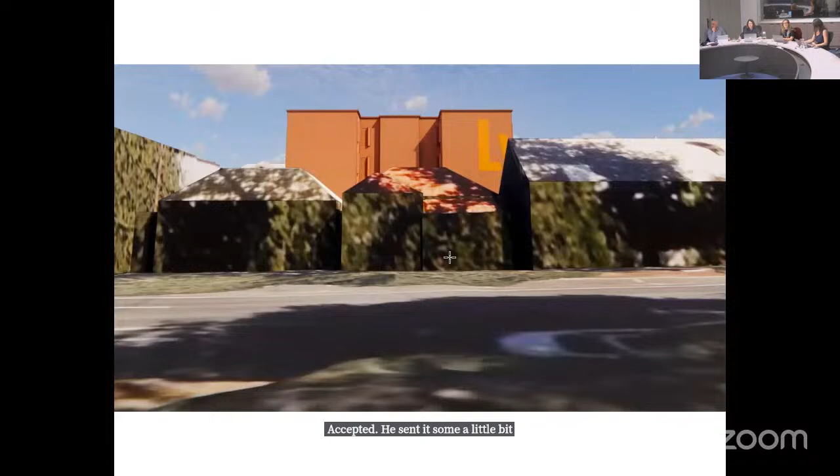Despite a directive to assess the Fremantle Tech College, our home on Norfolk Street and the Port Flour Mill, the Heritage Impact Statement doesn't even include a single word about the flour mill. It's been entirely omitted. To add insult to injury, it's referred to 10 times within the objection section. Why would you refer a concern about the flour mill to a heritage statement that doesn't even acknowledge it exists? They may as well refer to an old phone book, because at least that has the flour mill in it.

The Waste Management Plan also overlooks its residents, stating the site is surrounded solely by commercial properties. Twenty residents' homes are just ignored. There are more residences than commercial properties, by about 4 to 1.

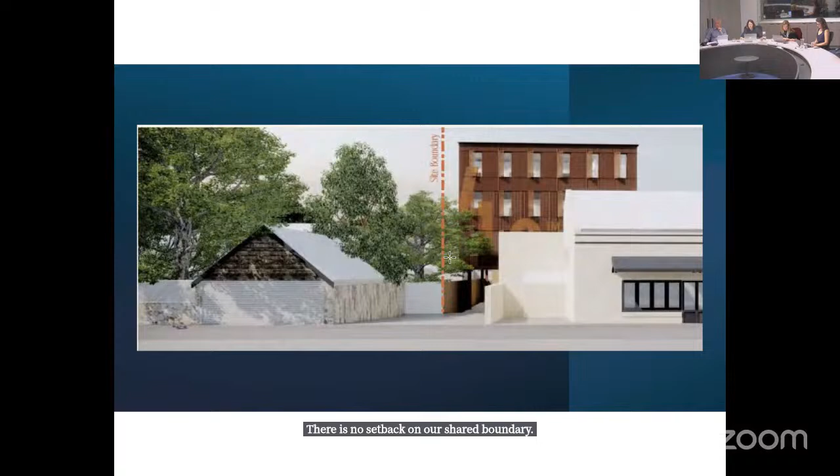The shadowing report is flawed. The report has used the combined square meterage of both 26 and 28 Norfolk Street in their calculations when used to assess impact on number 26 Norfolk Street. Whilst we currently occupy both 26 and 28, they should be considered as separate residences as they are on two separate titles, either of which we can deal with independent of the other.

Given both blocks and houses are of similar square meterage, the figures the developer has provided should be at least double. The shadowing report provides figures of 556 square metres for a total land area for both 26 and 28, and further states 34 square metres of 26 is affected by shading, a percentage of 6.1%. The total site area of land at 26 is in fact 278 square metres. Therefore, the percentage of 12.2% is more accurate.

This is a fundamental error, and one is left to ponder how many other errors have been made in this development application. Moreover, for the shadow to reach the house, it has covered our entire backyard and our outbuildings, both of which have not been considered. I submit that the percentage of our house and land affected by shading is far greater than that indicated on the report. Shadowing is important to us as our limestone home suffers from moisture retention and rising damp.

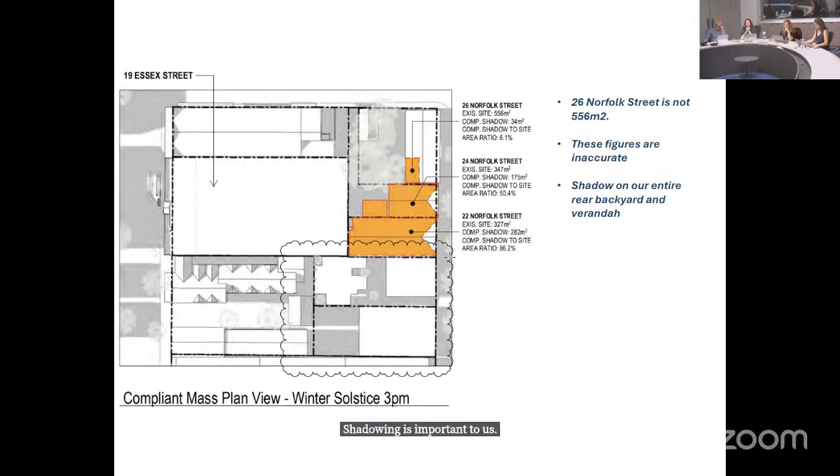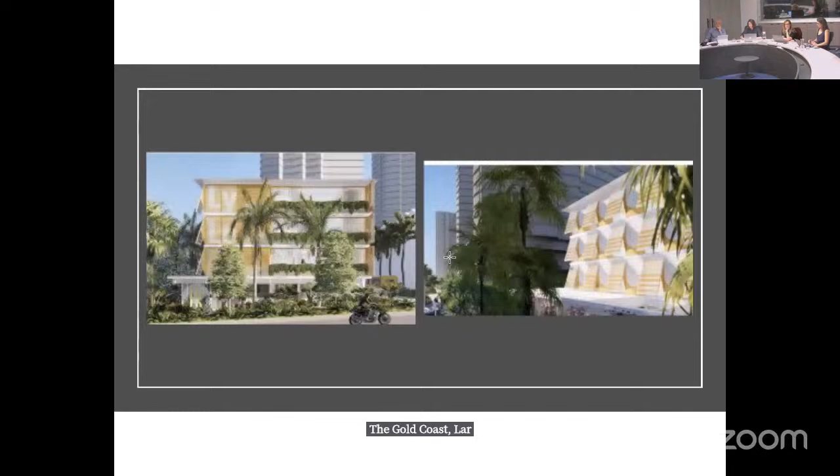This is a monstrous development, the biggest pod-style development in Australia. The Brisbane Larue consists of 81 pods and, more importantly, is appropriately located in a commercial area surrounded by high-rise, not multiple heritage-listed properties. The Gold Coast Larue consists of 121 pods and 13 parking spaces, and again is located in a suitable context, surrounded by high-rise buildings.

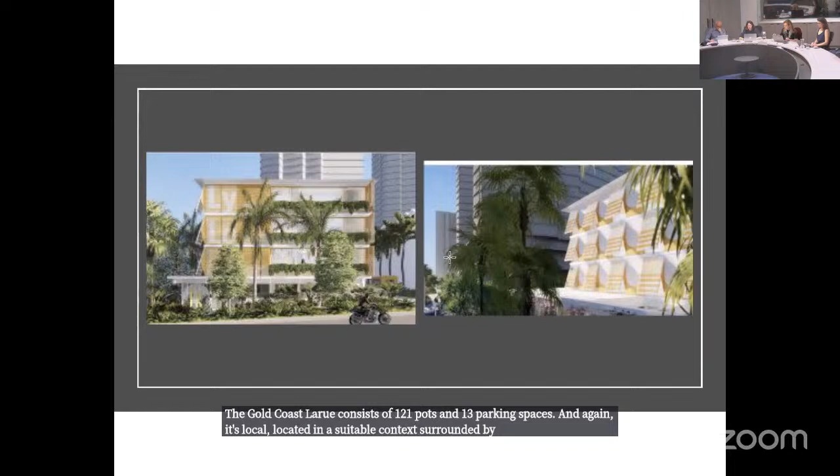The Fremantle development immediately abuts 20 people's homes, being of either one or two-storey construction. The developer uses the terms harmonious and sensitive in its application, yet we can see nothing either harmonious or sensitive in these images.

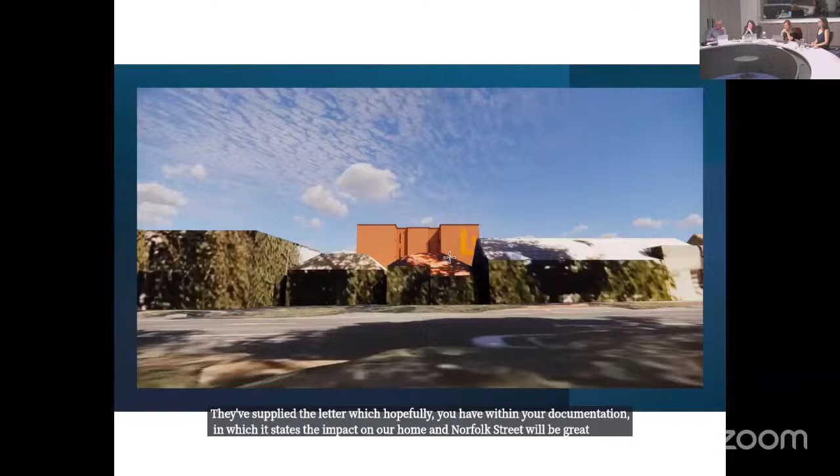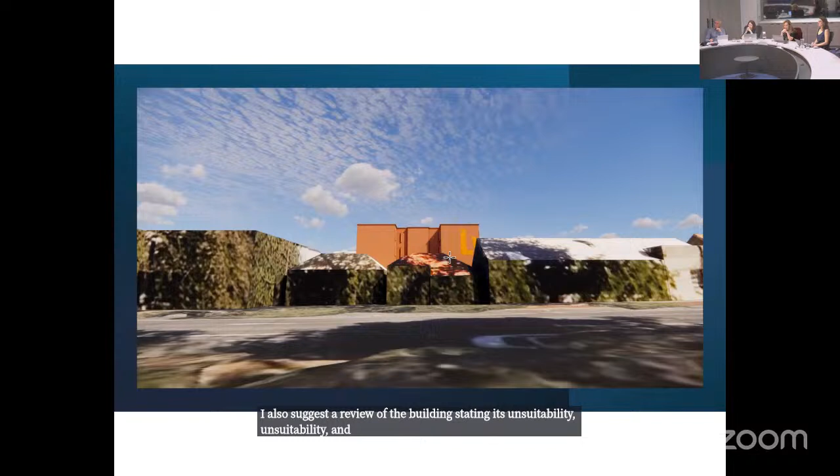In conclusion, we availed ourselves of the National Trust Advocacy Services when we found out about the development. They have supplied the letter, which hopefully you have within your documentation, in which it states that the impact on our home and Norfolk streetscape will be great, and strongly feel the 4-storey should not be approved. They also suggest a review of the building design stating its unsuitability and address the impact on the flour mill, something the applicant completely ignored.

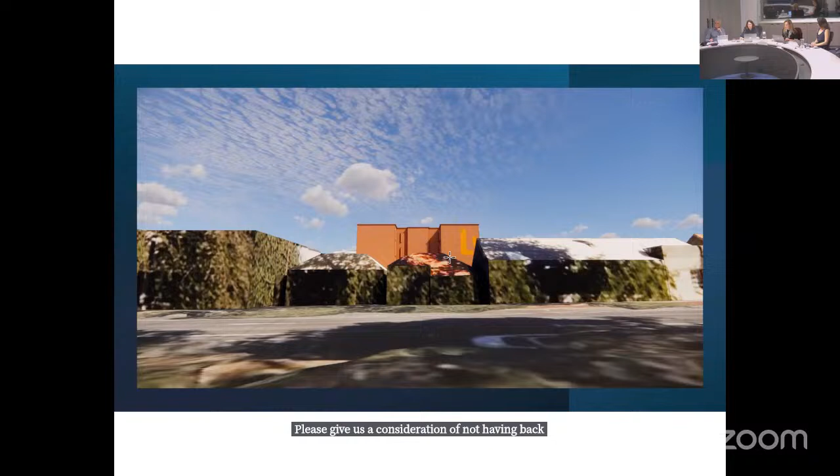If anything, we would like to see the existing building shape and form extended and for adequate setbacks to be given for the sake of our privacy and enjoyment of our home. Please give us the consideration of not having backpacker windows open to our private space and not having 24/7 bin noise carrying into our home. Thank you.

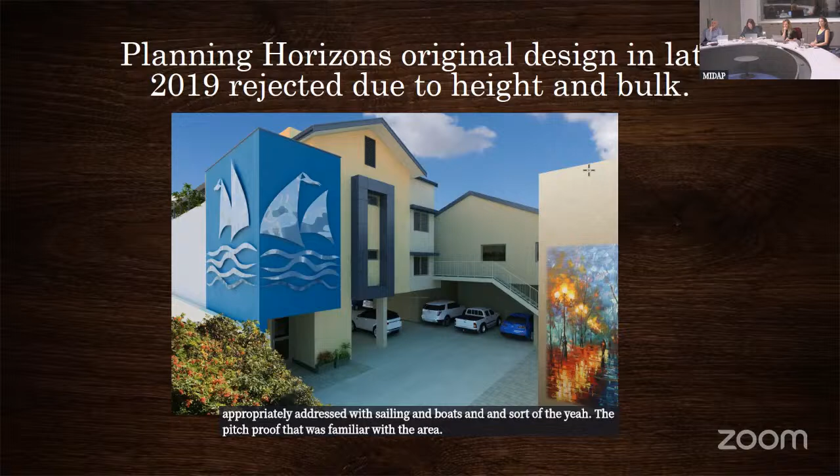This is the initial application that we made back in 2019. We thought it'd be appropriately addressed with sailing and boats and a pitched roof familiar with the area. After lengthy and rigorous negotiation with the DRP and the City of Fremantle Council, it was determined that something like this would be more appropriate.

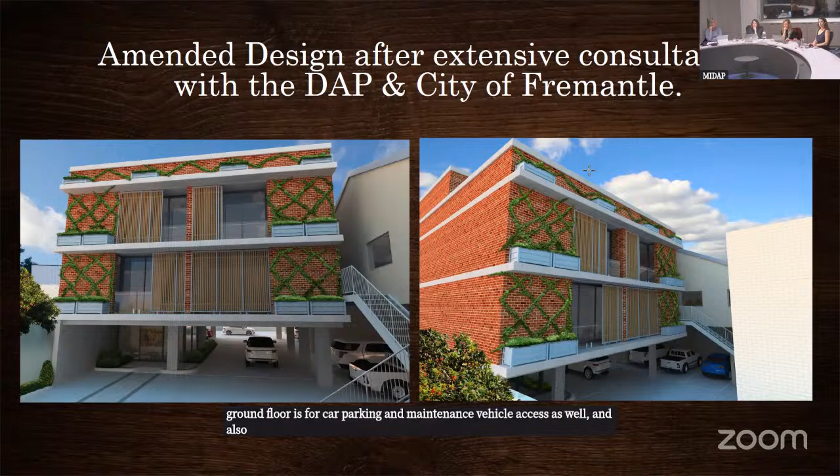So this is our secondary proposal of the development, which is, as you can note, 2-storey. The ground floor is for car parking and maintenance vehicle access, as well as storage, which is very important and lacks in this current proposal. That didn't quite hit the mark, so we then came to a final permutation of this development, which is 2-storey, 8 bedrooms. The top floor has a very discreet rooftop terrace, with no actual accommodation up top, and of course we provided 13 or 14 car bays as well as waste disposal.

Very sympathetic to the area, we did acknowledge the overshadowing of the adjoining properties and the impact in terms of building bulk, vehicle access and noise, and all these items were addressed. Our concern is that under the current proposal, none of these have been addressed, and in fact they've just taken this from an approval that was only 4 years old, given it a shot of steroids, and put it over the top without really respecting what the area requires and deserves.

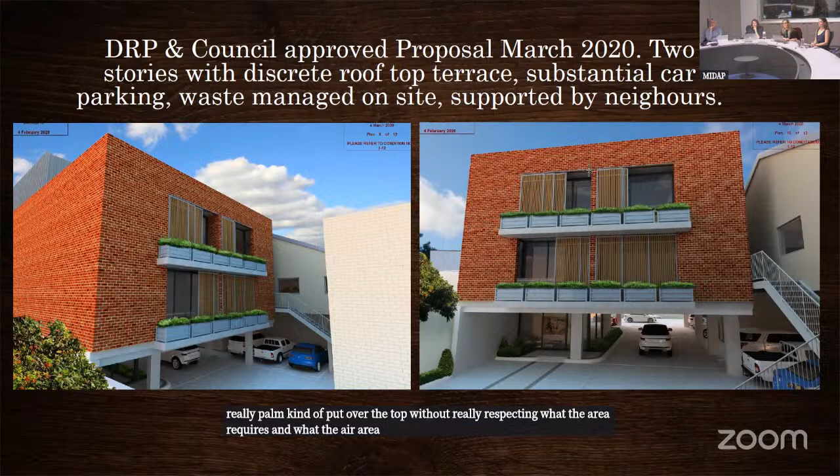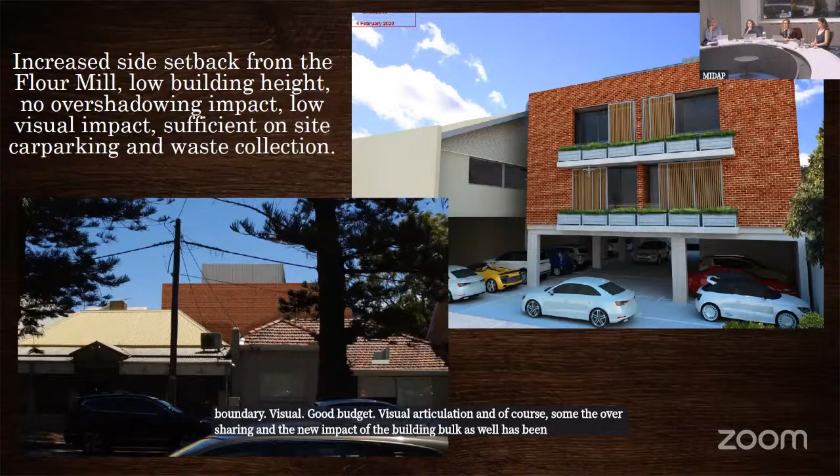So in summary, that is what it looks like from Norfolk Street. Again, quite discreet and much more sympathetic to the area than the current proposal. The setbacks have been increased from the southern boundary and the western boundary, providing neighbours privacy and good visual articulation, and of course the overshadowing and impact of the building bulk has been significantly lower than what is actually being proposed in this current application. That's a quick summary of what we had approved and what is now being proposed.

In a short space of just 4 years, neither the built environment, planning strategy, nor development guidelines in the West End have changed dramatically since 2020. So why is the proposed development considered acceptable to the city when just 4 years ago our approved design was the maximum size building acceptable for this site?

I would also like to add that we were congratulated by the DRP and the council for our design after quite a lengthy process. So our concern is raised about what happened to the standards that were quite stringent and held up 4 years ago, and why they've been relaxed today. That is the summary of our objection. Thank you.

Members, questions? Just wondered, with the approved design, did that also incorporate the buildings facing onto Essex Street? No, it didn't. They were kept quite separate.

So your hotel design was going to be accessed from the right of way, and that's how people would get to reception and to their rooms, is that correct? Yeah, it was completely freestanding, with no connection to the existing building. It was going to be quite digitalised, in that you'd be given an access code to get into the building and then to your room.

It was going to be similar to the One Hotel with the Sea Containers around the corner, that sort of level of hotel. So no reception? No reception at all. Limited staff to take care of amenities, but it was simply 8 bedrooms, spacious bedrooms with good size ensuites. It was also designed to be budget conscious, so there was not the cost of having staff there constantly.

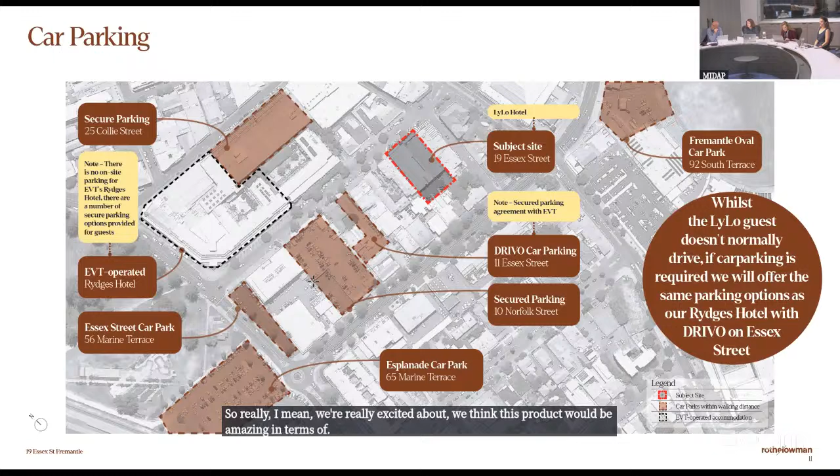Thank you. As the primary author of the Heritage Impact Statement which accompanied the DA, I'd like to set out the reasons why the proposal is capable of being supported on the basis of our Heritage Impact Analysis, which was in accordance with the Officer and DAC recommendations. The HIS was written in accordance with DPLH's guidelines, which assess the proposed development against the established heritage significance of the subject site, part of the former Mills and Co building, and the central Fremantle area.

Adjacent state heritage listed places, including 26 to 28 Norfolk Street and the Fremantle Technical School, were also assessed as part of this Heritage Impact Statement.

Prior to DA lodgement, the project team had positive discussions with the city's heritage coordinator and the planning officer. This was confirmed in the officer's report, which concluded that the proposed 4-storey accommodation block is located at the rear of the site and will not directly affect any significant heritage fabric at 19 Essex Street or adjoining heritage places. The city's DAC was also supportive in relation to the development's approach to context and character.

The proposal was referred to the Heritage Council based on the proximity to Port Flour Mill, 26 to 28 Norfolk Street, and a limestone wall on the shared boundary. Written advice from the Heritage Council concluded that the proposal will not affect the cultural significance of the adjacent properties, and they recommended conditions for ameliorating any possible impacts during construction.

RHA has found that the proposed changes to 19 Essex Street are in line with the Australian ICOMOS Burra Charter principles and will not impact the site's noted significant heritage fabric. The new work is identifiable as such and respects the scale, form and materiality of the surrounding heritage context, and is reversible without causing any physical damage.

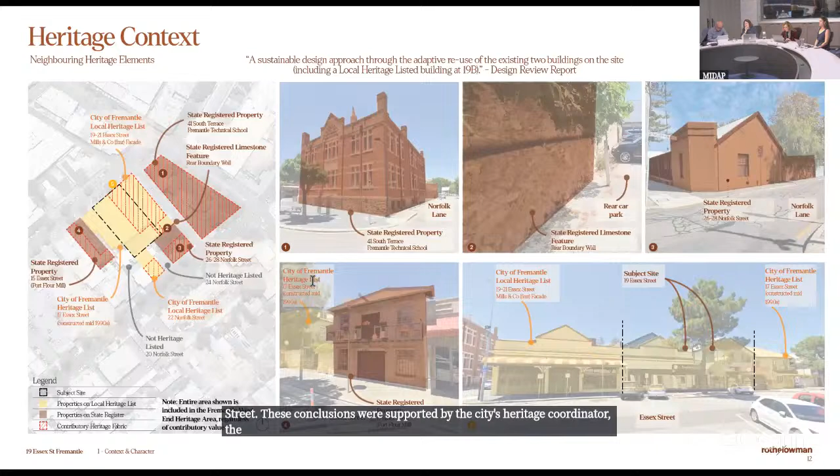These conclusions were supported by the City's Heritage Coordinator, the DAC, and the Heritage Council's written advice. Thank you for the opportunity to speak in support of this proposal.

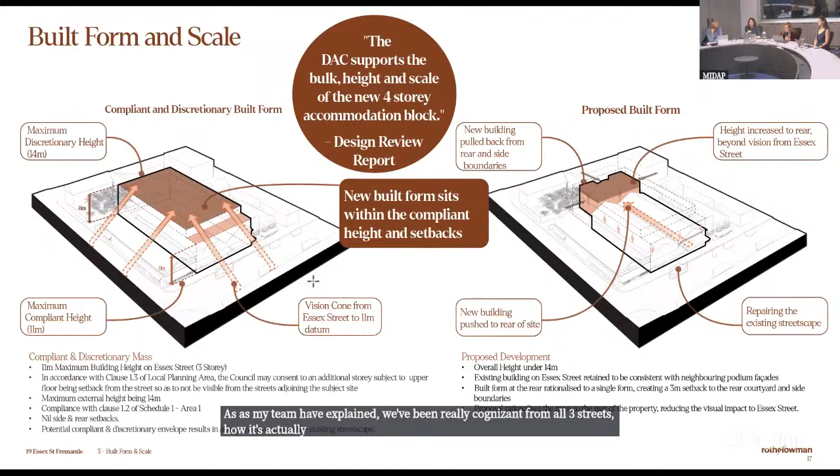You can see through here the top solar access, which is what the impact would have been if we had built completely to the allowable planning control footprint. What you can see below that, with the blue and then the light blue around it, is what the actual impact is. We've pulled it back, set back. There is less impact of overshadowing with what we're proposing compared to what might be if it was a fully compliant built form.

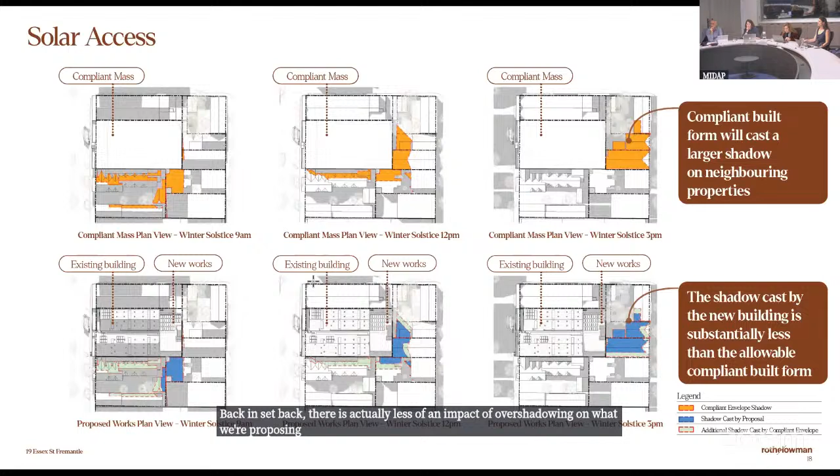You can see here through privacy, the pod rooms are built and contained within the existing roof structure. The new darker colour on the back is the en-suited rooms, and we've provided privacy screens facing the views towards the commercial properties, away from the residential properties. So they won't be overlooking, and in fact only a minimal number of residential apartments, and only 2 rooms facing to the east as well.

You can see here through the massing impact, again we've taken into account the allowable compliant built form. I would have to ask you to conclude.

Thanks, Tony. I'll be very quick. So you can see through here in terms of the sectional impact - this is one of my last slides - the impact you can see with the visual and how we've ameliorated that space, and the summary through there.

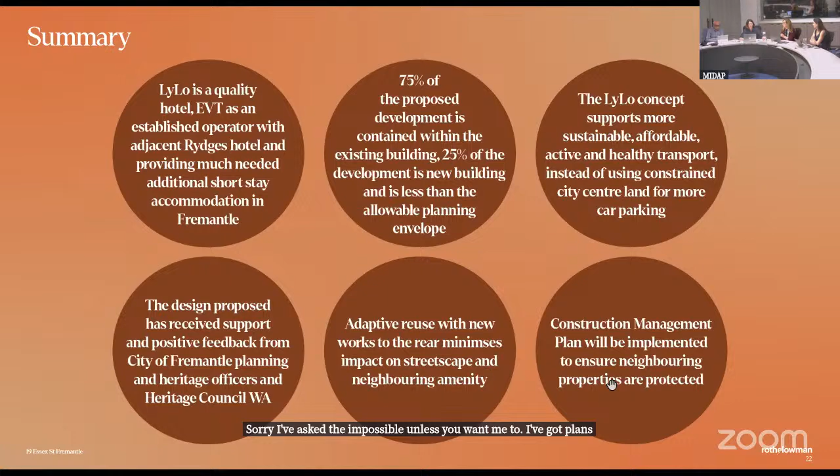It's not moving. Sorry, I've asked the impossible. Unless you want me to, I've got the plans, I can probably explain the waste management. We can speak to the plans within the agenda. Sure, yeah, absolutely. Hang on, okay, we can probably do it here. So this is not the ground plane, this is the area above that, but I could connect it to the plans on the agenda. Members have copies of the plans in the back. So I guess in the plan, I don't know if you can...

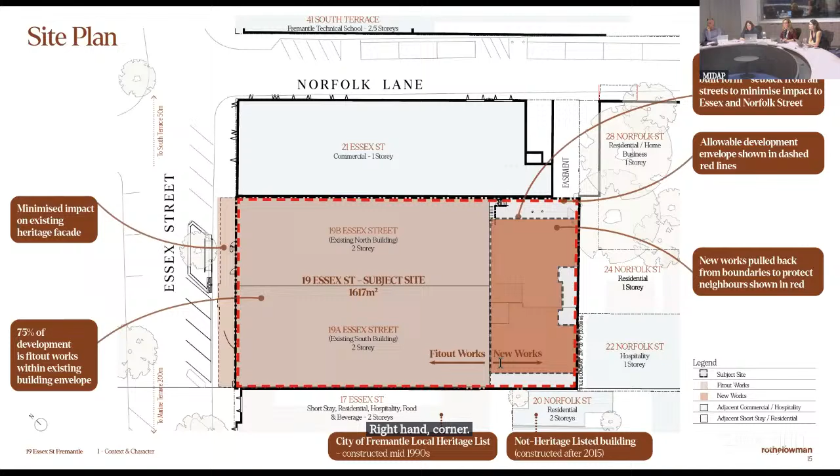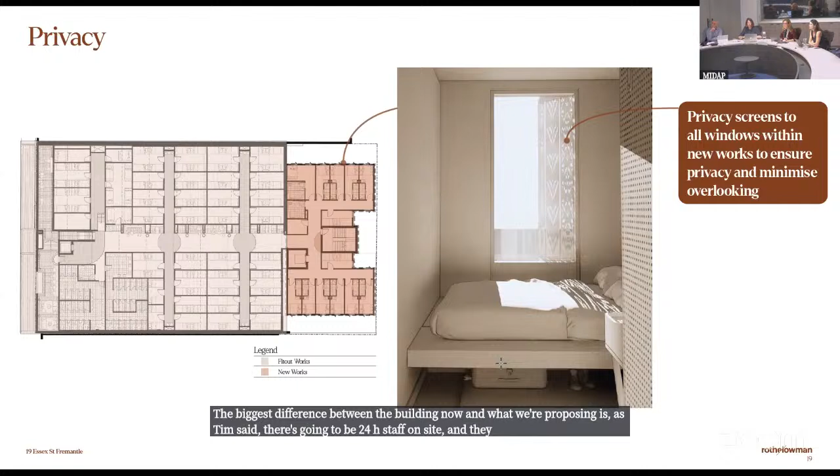So our bin store is through here, managed in the bottom right-hand corner. All bins are contained through here, pulled out by staff, and when emptied they're brought back in again through here. The biggest difference between the building now and what we're proposing is that there will be 24-hour staff on site required to do this, which doesn't happen at the moment. So the situation will be improved because there will be paid staff on site 24 hours a day to pull the bins in and out.

Is that a private collection on Norfolk Lane, or is that for local government to collect? We're working through it with local government at this point, but if needs be, as part of the waste collection, it'll be private. It'll be determined through the waste management plan, and that's in perpetuity through the activity of the development.

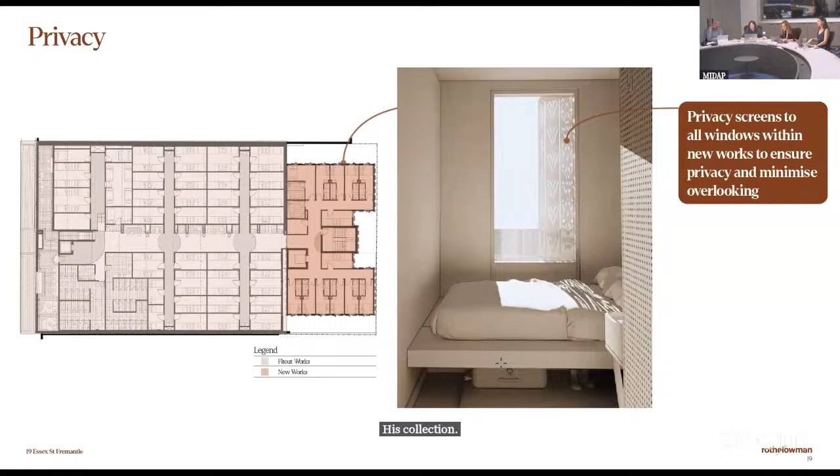May I ask a follow-on question? How many bins and how many times a week is collection? Three times a week that we're proposing. There are 5 bins within the bin storage area, which was assessed by the city's technical officers and amended based on their requirements. There's an area for bulk waste as well as recycling and general rubbish, so that's a total of 5 bins plus a bulk waste area. They're required to be kept in that storage area rather than at present, which neighbours have pointed out, where bins are just kept in the laneway getting in everyone's way.

Thank you. I have one final question, and I will foreshadow this to the city's officers. Obviously the scheme provisions allow for 3 storeys, but there's discretion for a 4th floor within the scheme, provided certain things are met. Can you provide the basis of why you think it meets the scheme provisions?

Certainly, perhaps I'll touch on that. The scheme provisions set a base height of 3 storeys and then up to 4 storeys. The primary consideration for up to 4 storeys is that the 4th storey be set back from the street, which in this case is set back quite well so it can't be seen. There are other discretionary objectives looking at views from the street and amenity considerations, and we believe we've addressed those in terms of overshadowing and overlooking, within the context of the site being zoned city centre. So we think the 4 storeys is consistent with those provisions.